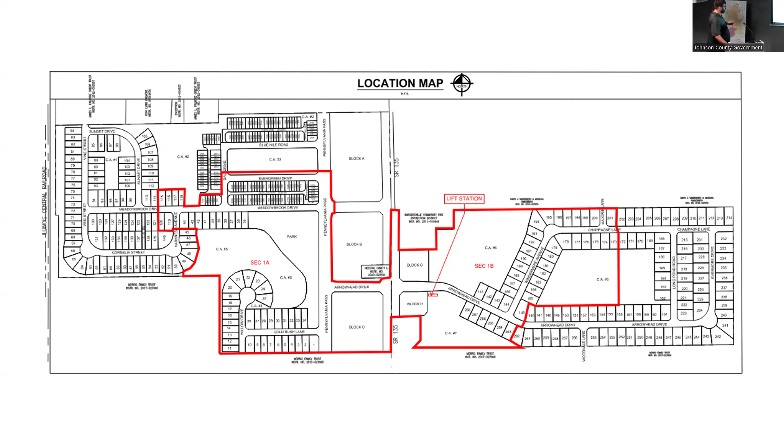And while we still conform to Johnson County's release rate requirements of 0.1, 0.3 CFS per acre, we do have some offsite. Could you please flip to the last page of this presentation? I think it'd be better to view. Yeah, so this is the project site. 1B is roughly that red line.

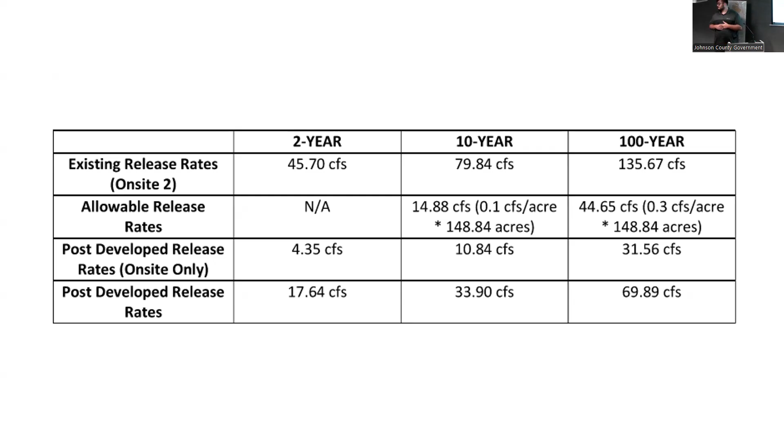Just asking, where's the culvert going to be? On the Burrs property? The east side of 135. Would you go back one? Yeah, one more. Right here. So this is our connection, our curb cut. The Bargersville Fire Station is this dashed line right here, that parcel up there. This is where our curb cuts to 135 are, and then the culvert will just cross the ditch to serve this development. So all that water is going to go into that ditch also.

Yes, a majority of this area goes to that pond and then discharges just south of your driveway. And that pond on the right discharges in that general location too. And the entire west side of this development is routed to ponds and then under 135 and will discharge on the downstream side. So you're just proposing rerouting the water around so it goes to the same ditch. It will be rerouted, but the peak release rates in the 100-year and every other year will be lower than what it is today.

And any future development south of us, they can either route into the ditch. There's a corner of the ditch that is on their property. But also, as they develop, they'll take the offsite drainage and they'll control it. And then you'll see lower peak release rates on this development, as you'll have more detention upstream of that offsite. Currently, with this development, you will not see any detention of that offsite.

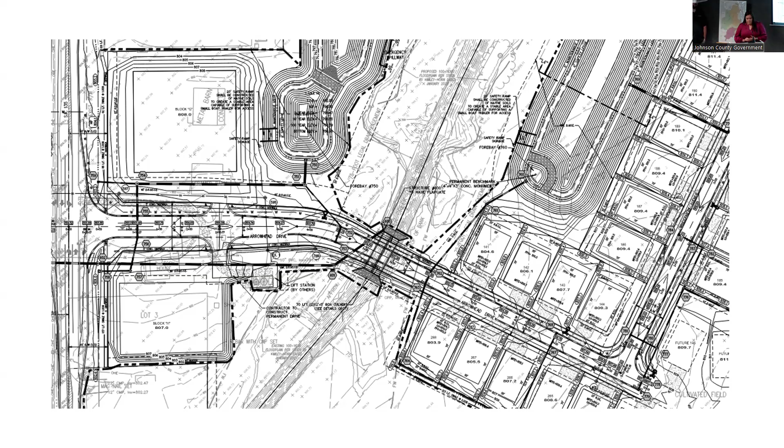Yeah. Could you please flip to the last page of the presentation? So that approximate area of that location is right here. And as you can see, there's 74 acres of on-site land, and then there's probably 30 to 50 acres of off-site land that is all routed through that point today where that photo was taken. Plus you have additional drainage from the north from the tile. That tile flows right through here, through these wetlands and then under 135 to that point.

So with this development, we're taking this chunk off. We are not impacting the tile. We're planning on building a commercial pad next to the tile. And then the developer of that commercial block, if they determine that they need more area to develop their commercial ground and they want to go through redoing that tile or reducing the width to an urban tile, that is up to the developer of that property, but that will not be Four Star Group.

So with this proposed development, we will be taking off all the drainage that does surface flow over to this point. And then there is a 3 foot by 4 foot box culvert under 135 that will be extended with our State Road 135 improvements.

I think it's extended 10 feet just to add an extra right turn lane. And then on the other side of that, there's a 15-inch pipe that I believe Larry installed, and then that goes to the tile. So I think part of the issue with that 15-inch pipe is it allows, as the ditch stages, tailwater to back up and bubble out next to State Road 135. That's just a potential issue that I could see happening there. But I'd have to look at it a little more to be certain.

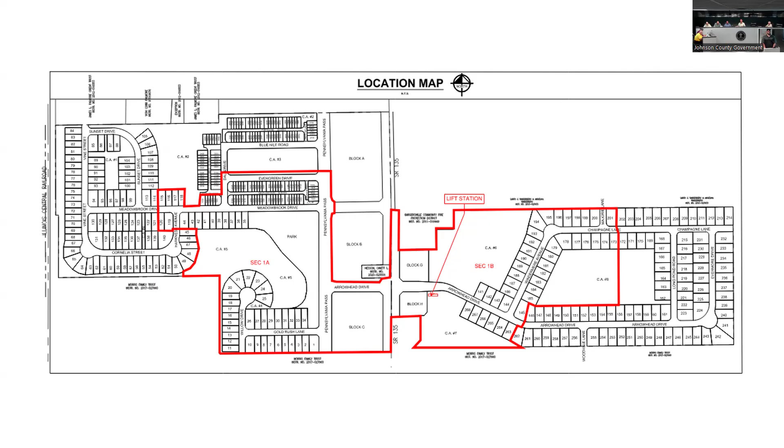So that's the motion. We'll continue at 30 days. All in favor, say aye. All opposed, same. Okay, thank you for your time. Thank you.

All right. Moving on, the next one is DR 25-000-3604, Fairhaven Christian Church, commercial preliminary and final. Ashton Fritz with Fritz Engineering. Good evening. I'm Ashton Fritz with Fritz Engineering, address 14020 Mississinewa Drive, Carmel, 46033. As stated, we're here for preliminary and final drainage board approval for a building addition on Fairhaven Christian Church located at 1476 West County Road 300 South.

This project is, I'll say, a continuation, albeit 15 years later. The project came before the board and received approval back in 2010 for, I'm going to guesstimate, about a 22,000 square foot building addition. They only built about 10 back then, and here comes the other 10,700 some change. There is no new proposed drainage infrastructure. All the infrastructure was built back in 2010. This building addition will simply be filling in the spot that wasn't built back then. Drainage infrastructure includes on-site inlets, pipes, a detention basin, etc. Glad to answer any questions or comments.

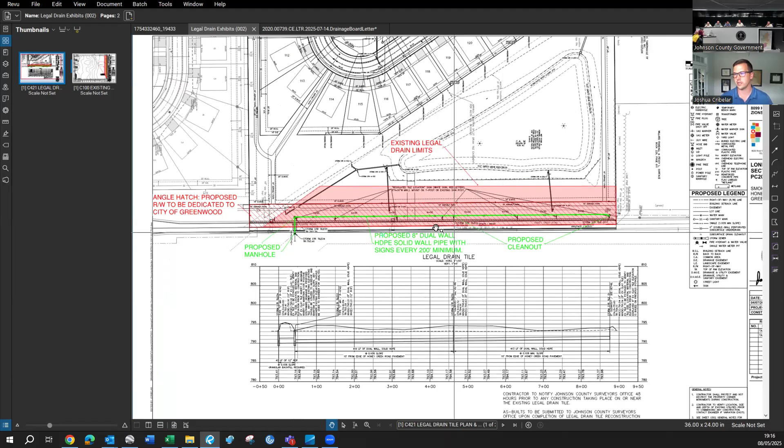I'll go ahead and present and show you what we are proposing to do within this easement. I assume everyone can see my screen, correct? Mhm. Okay, awesome. North is to the right in this situation. Honey Creek Road is along the bottom, or to the east. As you can see, the green line is the outline of our proposed reconstruction of this existing 8-inch tile. We are proposing to reconstruct it in the same size, but as a solid wall HDPE pipe with a 12-inch RCP crossing under Honey Creek Road.

We are required by Greenwood to widen Honey Creek Road approximately 4 feet. Therefore, we are realigning the tile to be 10 feet outside of the proposed edge of pavement. Greenwood is also requiring a 10-foot asphalt path to be installed within the proposed right-of-way that we will be dedicating via secondary plat. So that will be encroaching. And otherwise, there will be just minor grading because this area is relatively flat, similar to what it is now.

I will state there is a drainage ditch beyond the edge of this tile. That drainage ditch drains to our proposed storm sewer and then into our proposed pond. So nothing from our site will be contributing to this legal drain tile. I was not expecting to hear the urban reclassification. We don't have an issue with that.

I think maybe it takes some of the asphalt path out of the encroachment, but not an issue. We do have the signage already shown on our plans. And otherwise, Greg, I think the only condition that I would ask is that I think it was item number 2 where you stated nothing to be built over the legal drain. Obviously, we may have some utility crossings, or I don't know of anything else on this one in particular, but I would ask that be amended to allow nothing to be built over the legal drain besides what's showing in the development plan.

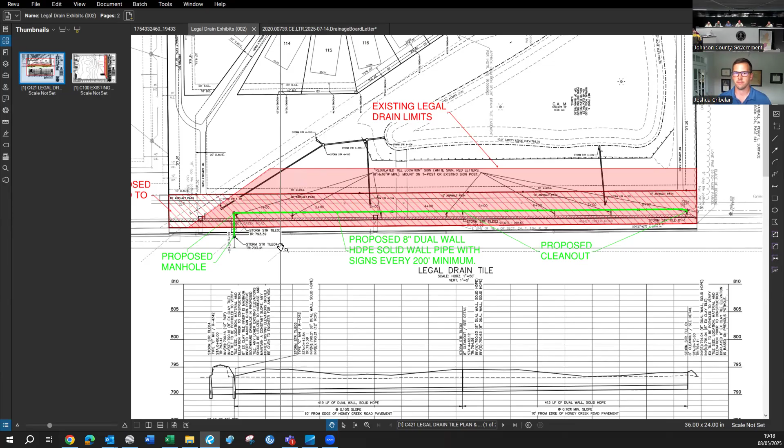And with that, that's everything I have to say about this, so unless there's any questions. Any questions? So they put in a solid tile. Yes. Would there be any tile from the other side of the road that feeds into that? No, anything that's feeding into it is coming from the north. So it won't affect any. So on the site, there would be no water coming in. Anybody in the audience have anything to say?

Greg, do you agree with his condition on your condition? I do, as long as they follow the development plan. Okay. We fully intend to. I move for approval with all the conditions that Greg outlined in his presentation. With the condition on the condition? Yes, number 2. Okay. Number 2. All right, we have a motion and a second. All in favor, say aye. Aye. All opposed? Same. Motion carries. Awesome. Thank you, board members.

Okay, next on the agenda is DR-25-040-3610, Reese Wholesale Storage expansion, continued to 9/2/25. Commercial outlet, regulated. For the record, Greg Cantwell, Johnson County Surveyor. We have not had enough time to do our review of the resubmittal, and the surveyor's requesting continuance to September. Okay. Need a motion from the board. A motion to continue. Second. Okay, we have a motion and a second. All in favor, please say aye. Aye. All opposed, same. Motion carries.

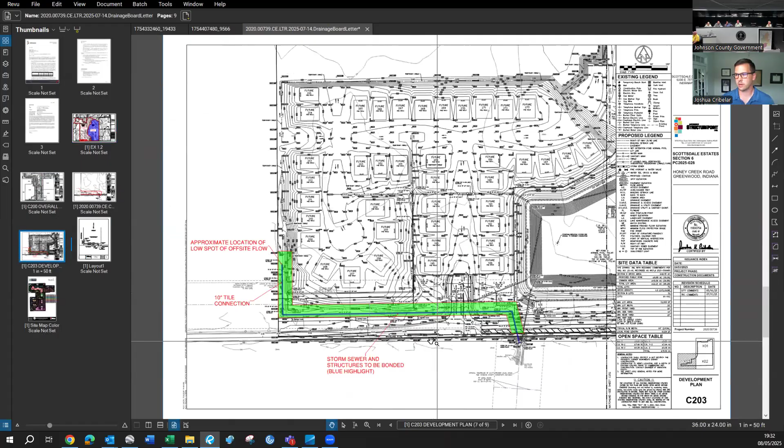And this is, let's get to this one. This is the proposed new tile. You can kind of see the layout of all of our drainage patterns here. We have storm sewer that comes right up against this to make sure that we are not sending any storm sewer to it and that we are collecting our own storm sewer and taking it to our ponds.

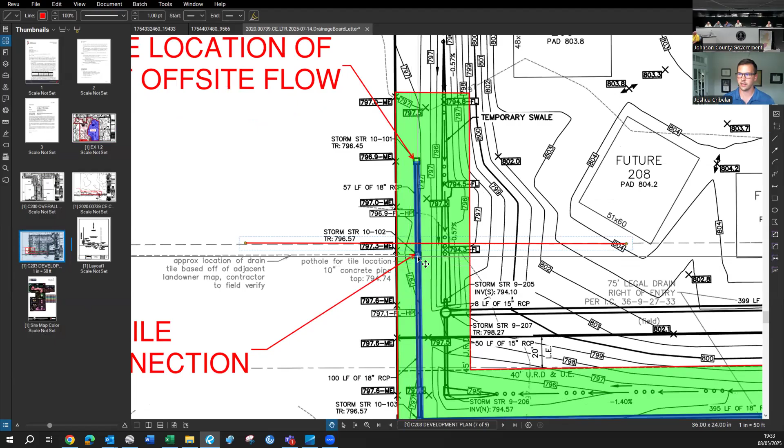You can see this line here is the north edge of the existing legal drain. And then this line just to the south is where we potholed that 10-inch tile and are connecting it into a structure. Greg had asked for a legal description and exhibit at the last meeting, just to get this recorded and defined for the new easement, and we have provided that. So we will be ready to execute that as soon as it's ready.

And I think that takes me through everything that I thought was worthwhile to note here. Also, Greg provided some conditions at the last meeting, and we agreed to all of those, as well as the conditions that were sent just before this meeting. Yeah. Thank you, Josh. Thank you.

Any comments from the audience? Just adding more water to the same ditch. Right, Greg? It's same area, yeah. So remind the board, this is what we put a 60-day stay on. We needed more information, and if that information that Josh just presented is enough for the board.

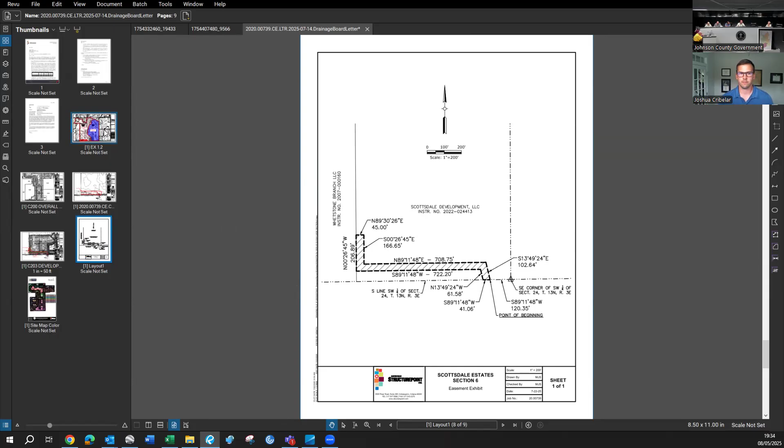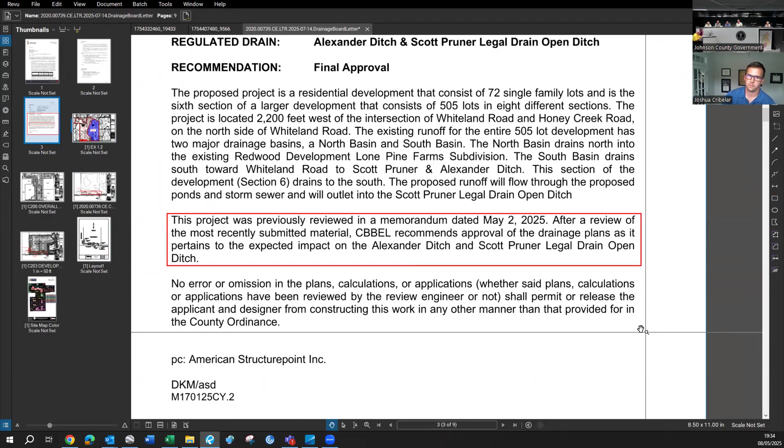Excuse me, I'm unclear on one thing, and part of it was the volume, I didn't quite understand. Greg, did Burke affirmatively state that they found no adverse impact on downstream properties, or was the report just silent on that matter? If you know. I do have Burke's letter up on the screen, if that's beneficial for anybody to see. Not for me, I can't read it from here. Sorry, I tried to zoom in as much as I could.

It's okay. Burke recommends approval of the drainage plans as it pertains to the expected impact on Alexander Ditch and Scott Pruner legal open ditch. Okay. I will say you might infer that the expected impact would be positive from that statement.

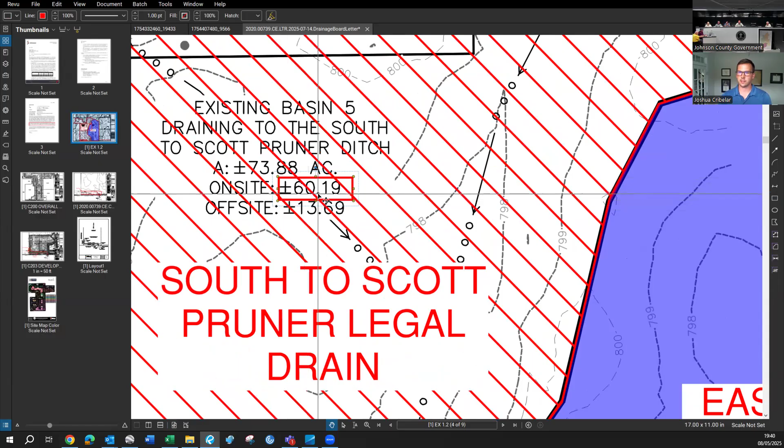That's what they've done: they've included that area that used to drain to the east, and they're draining it to the south. But they haven't considered that area in their allowable release rate. And just to prove it to you, the allowable release rate is 0.3 CFS per acre. Our on-site is 60.19. Go back to this table. Thanks. 60.19 times 0.3 is 18.06, which is this number here. Okay, thank you.

So it's not included. They're adding that area to the drainage, to the area that's going south. But they didn't consider that in their release rate. So basically they're storing all the water from that area to not impact the release rates. So they're holding that all back. Do you understand that, Larry? There's gonna be another ditch right on Honey Creek Road. That water's gotta go someplace right next to the blue, to the right. That's gonna happen. When this gets developed, there will be additional ponds that further hold it back to help that.

Okay. I don't think that impacts our discussion here about the detention and the reduction of the rates. They are significantly reducing the peak rates that are going to the south. Ideally, on paper, that'll help, but we still don't know the capacity of that ditch going to the south. That they're releasing it at a lower rate than what's allowed does have a positive impact on the ditch to the south. It still boils down to the capacity of the ditch and the study we talked about at the very beginning. From photos, it looks like the ditch is at capacity.

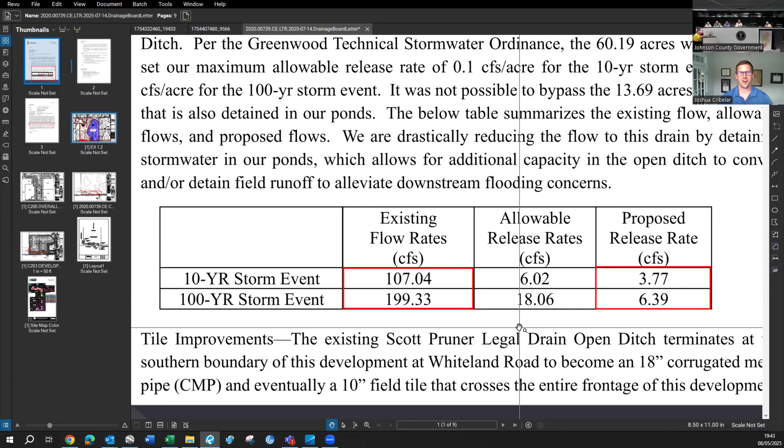Sorry for skipping over you, Josh. I saw your name on here. I guess I looked at the wrong item. All good. I appreciate you all's time this evening and wish you a good night. Okay.

New business? We've got ROA Land Indiana LLC, John Campbell, assessment for Scott High Bridge reconstruction. And he has patiently waited for 2.5 hours. I promise this will be the least controversial of anything. Commissioner Walls, members of the board, my name is John Campbell. I'm here on behalf of ROA Land IND LLC. If I could approach and hand out a few items to you. Yep. I promise to be brief, since I'm holding you up from having a pleasant evening.